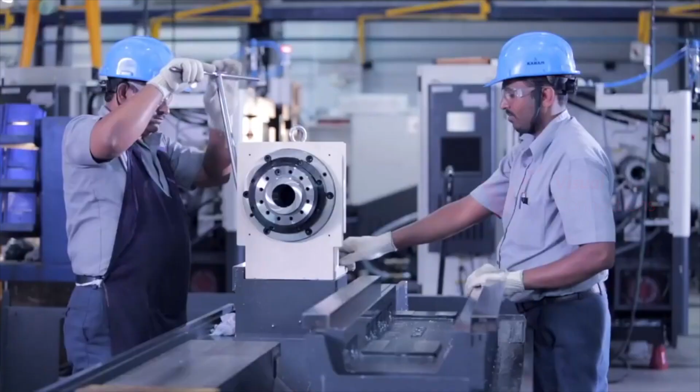With 42 years of machine building excellence and the experience of delivering 60,000 machines, Ace Micromatic Group, AMG, has played a key role in the industrial evolution of India and the world over. With more than 70% repeat customers, AMG is renowned for its technical capabilities in the machine tool realm.

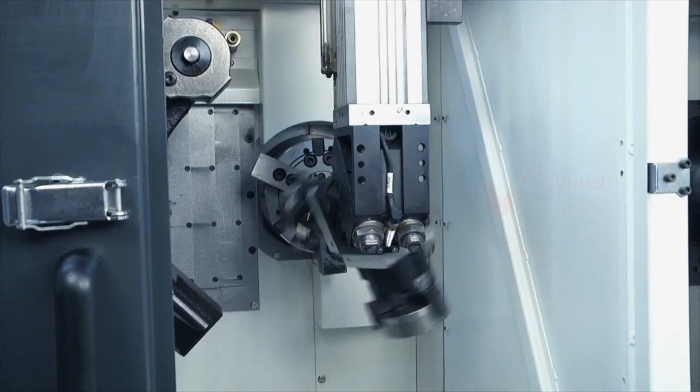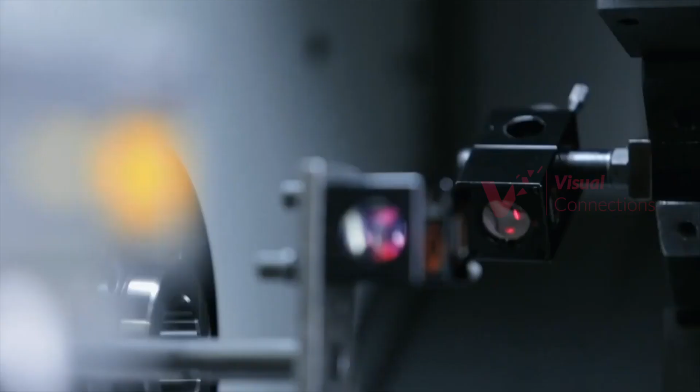Driven by passion for service, cost effectiveness, and a strong value system, AMG is the preferred machine tool partner across market segments. With a global footprint in over 15 countries, AMG machines have been an invaluable resource in producing quality components for a diverse range of applications.

With a vision to be a single window solution provider for all customers' shop floor needs, we offer a wide range of products in the market, ranging from turning, milling, grinding machines, SPMs, to IoT and automation solutions. The group also envisions to diversify into newer technologies and geographies, thereby offering a wide range of solutions to our customers. Ensuring customer success through cost-effective solutions has been the motto of the group.

Today, with the inclusion of AMACE Solutions as our additive manufacturing arm, we are ready to revolutionize the manufacturing industry yet again. The current global metal additive market is valued at $2 billion but growing with a CAGR of 29%. The additive manufacturing technology is rapidly evolving to be a preferred way of manufacturing. It is now seeing widespread adoption in sectors like aerospace, defense, medical, automotive, among others.

AM technology is being explored not only for prototyping but also full-fledged production of parts. With the increasing acceptance of technologies like laser-based powder bed fusion today, we have reached a position where these machines need to be made in numbers viably to cater to the demand that is gaining. We welcome you to the additive manufacturing era.

Additive manufacturing offers unlimited design freedom. Design parts without worrying about process feasibility limitations that come with traditional manufacturing. In addition to this, the technology enables multiple parts with design variations to be printed in one go. AM simplifies part structure by eliminating auxiliary connectors and reducing the assembly time.

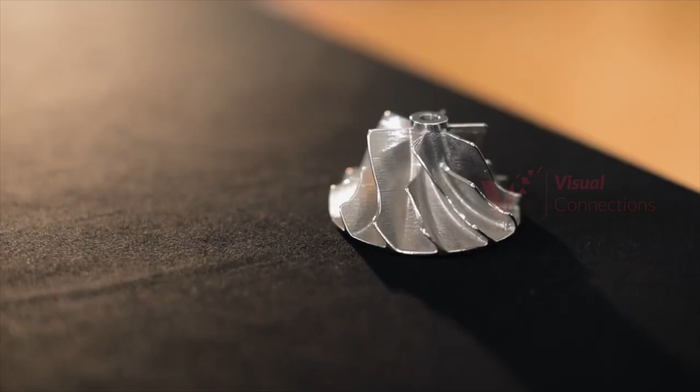Today, with over 10,000 hours of metal printing experience behind us, we have the capability of working with a range of materials like stainless steel, maraging steel, aluminum alloy, Inconel, and titanium. We've reached out to customers from different parts of the world, helping them solve their manufacturing complexities the additive way. Through the years, Team AMACE has worked with customers from automotive, healthcare sector, aviation, space and defense, mold making sector, and other general engineering industries to better understand applications of additive manufacturing.

AM technology is often viewed as process intensive with high machinery cost, low productivity rates, high maintenance cost, and essentially a higher cost per component. The availability of large format machines that follow the powder bed fusion technology is also limited. Most of these challenges have posed entry barriers for wider adoption of this technology. To overcome many of these hurdles, the ALM 400 was created.

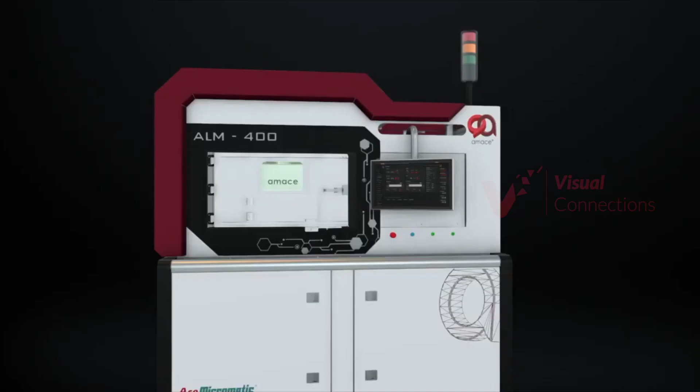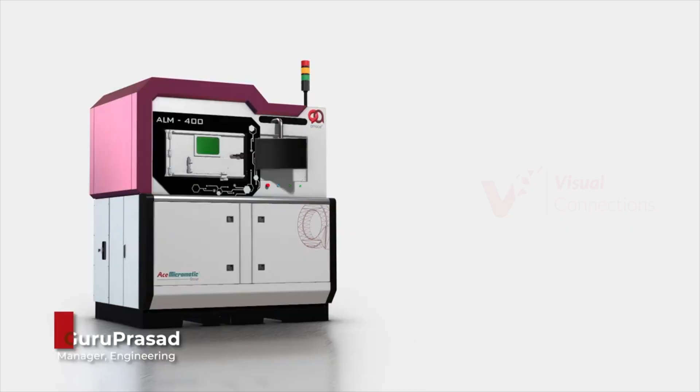For us at AMACE, the focus has always been to develop production-ready machines to suit large volumes of part printing. It provides the flexibility to address the larger sized parts and also higher volumes of printing. The machine is designed keeping in mind the wider variety of materials that would be required for development and experiments by the industry. Versatility of printing has been a key consideration in the engineering process.

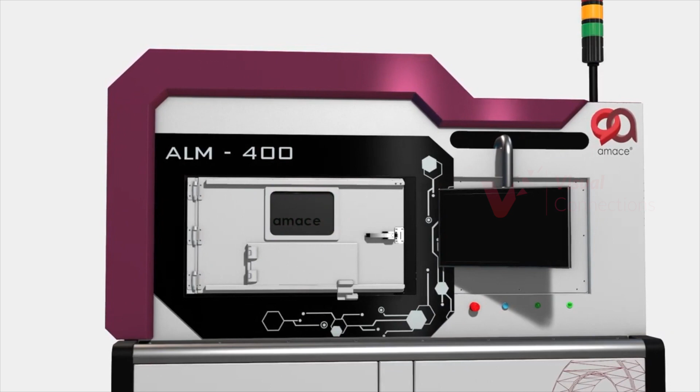The machine is equipped with a high productivity printing process and enhanced build parameters. This allows the printing process to be completed faster. The machine has all the necessary features to minimize the setup time, preparation time, and changeover time. The machine has a build envelope that allows large size parts to be printed on it.

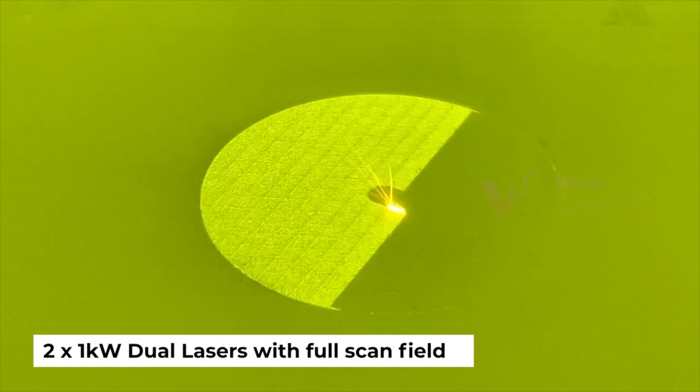A high-powered dual laser system enables faster printing with the ability to print higher layer thicknesses. With two high-powered continuous wave fiber lasers being offered as a standard feature, the machine allows for a wide range of materials and applications to be developed. The machine allows varying layer thicknesses to be printed.

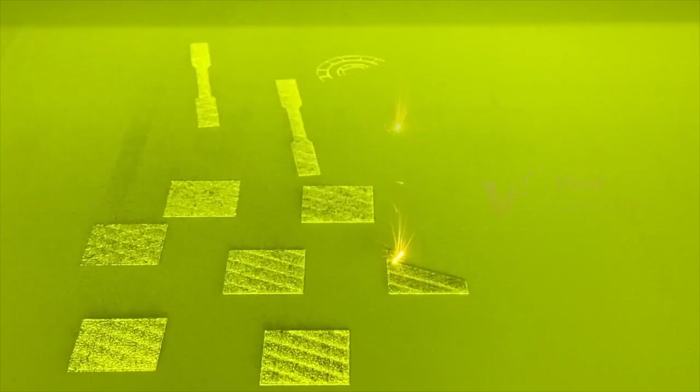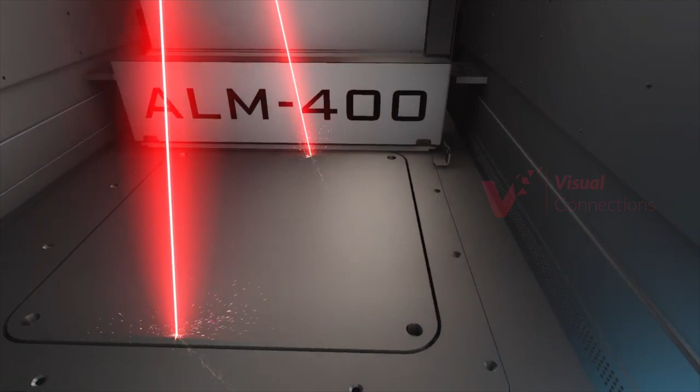The scanning system with digital encoders provides superior positioning accuracies and long-term stability, making it suitable for long periods of printing with minimum drifts. A dynamic focusing system allows exceptionally precise, high-performance positioning of the laser beam along the optical axis. The full scan field scanning system allows both the lasers to reach any corner of the build volume, thus more than doubling the print productivity.

The machine is equipped with an all-servo motor controlled by the most advanced PLC hardware, allowing more precise axis positioning, longer life, and enhanced serviceability. This also ensures a faster recoating, thereby minimizing the overall print time.

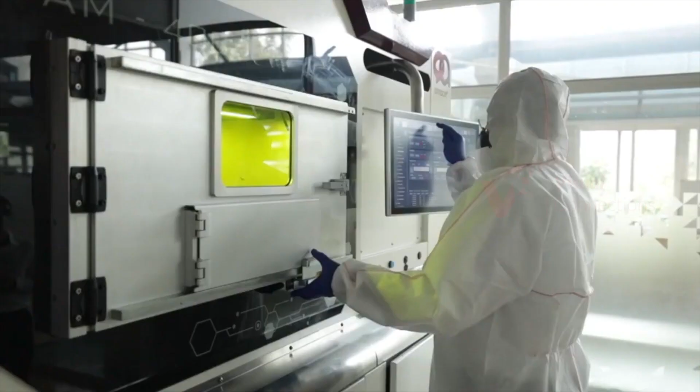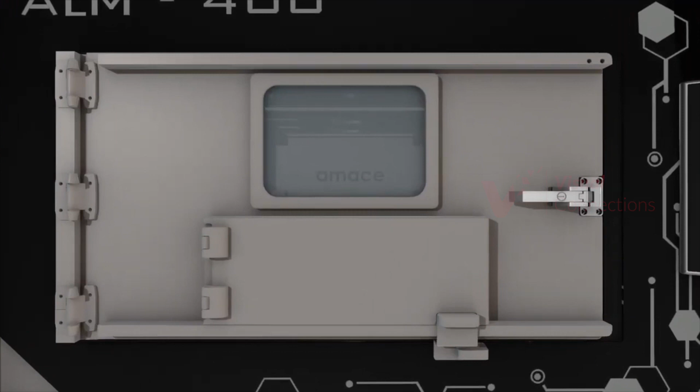An innovative multi-blade recoater system facilitates printing with minimum downtime during a build failure. This technology allows the operator to quickly index the recoater blade in the event of minor damages to it, thereby salvaging the build. A recirculating pump ensures minimum consumption of the inert gas, which is generated from a built-in system. The laminar gas flow on the powder layer maximizes the collection of the burnt powder during the printing process, thereby ensuring superior quality of the printed parts.

The ALM400 comes equipped with a host of features to enable safe and effective powder management. The smart powder management system comes with a real-time powder measurement unit which provides the current volume of powder available in the machine's storage section. A predictive system dynamically estimates the exact amount of powder required to complete the current print job based on the layer volume. This smart system allows the operator to plan for the amount of powder required in advance without having to stall the machine for want of powder.

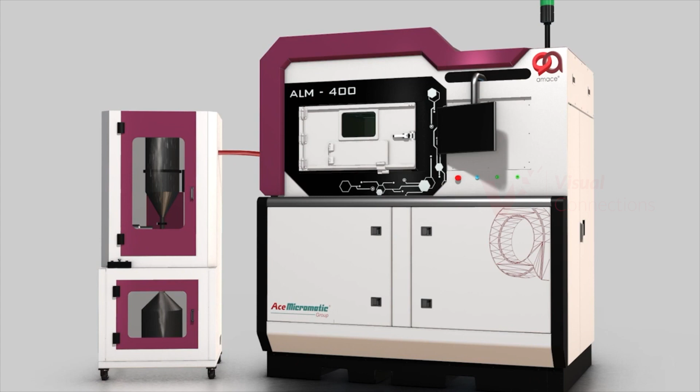A fast powder extraction system from the build chamber post-build ensures the machine is ready for the next print job in short durations. The entire powder collection from the machine's build chamber, sieving and restoring of clean powder is maintained in an inert environment. The machine is offered with fully open, editable parameters for a wide variety of metals such as aluminum alloy, stainless steels, maraging steels, Inconel, titanium, and many more.

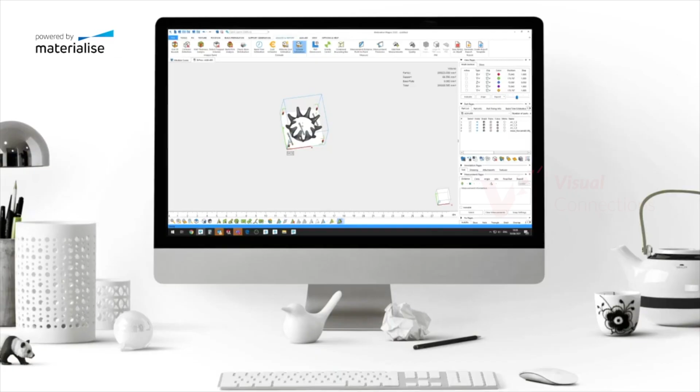The machines are built with best-in-class subsystems providing the highest level of machine reliability and superior quality of printed parts. The laser and scanner control system, which is the heart of the printing process, is controlled by hardware and a custom-developed software from Materialise. The build processor offers a seamless integration with the Magics and support generation software with most optimized data flow for build speed improvements. The machine design is validated by an expert team from Materialise. The ALM400 also complies to some of the most advanced machine building standards in terms of geometric capability assessments.

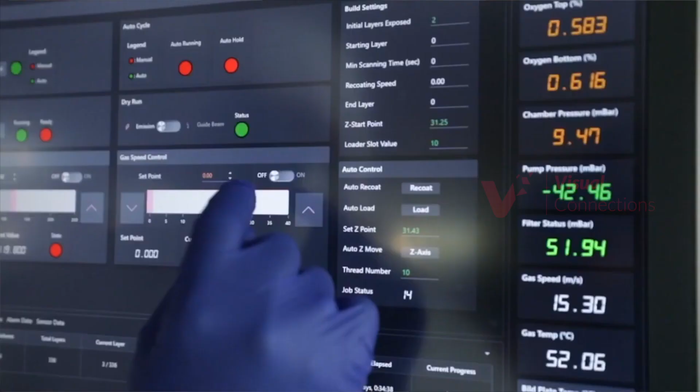The machine is made friendly not only to operate but also for maintenance and servicing. The powder loading is done outside of the build chamber, giving the operator freedom to load powder during the printing process. There are troubleshooting guides that support in faster retrieval of the machine, ensuring minimum breakdown time. Periodic maintenance alerts along with real-time monitoring of the vital statistics of the machine ensures better reliability and higher productivity.

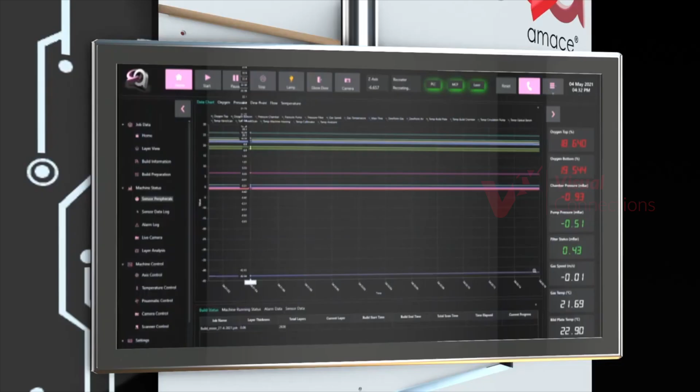The ALM400's control interface comes with inbuilt intuitive features facilitating the user with timely inputs about the machine status and recommends suitable action if required. This also ensures smooth operation with minimal intervention, further enhancing the user experience. Key parameters such as pressures, temperatures, oxygen levels, coolant level, and many other critical parameters are monitored and controlled. A digital cockpit provides the machine's performance parameters with historical data of the build progress.

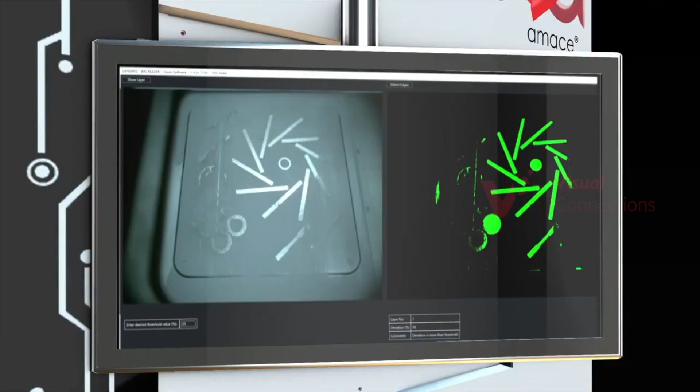A vision-based monitoring and inspection system identifies the deformations or issues in print after every layer. The inspection tool also compares the print area to the layer data and detects any non-conformances in the process, thereby allowing the operator to decide further course of actions.

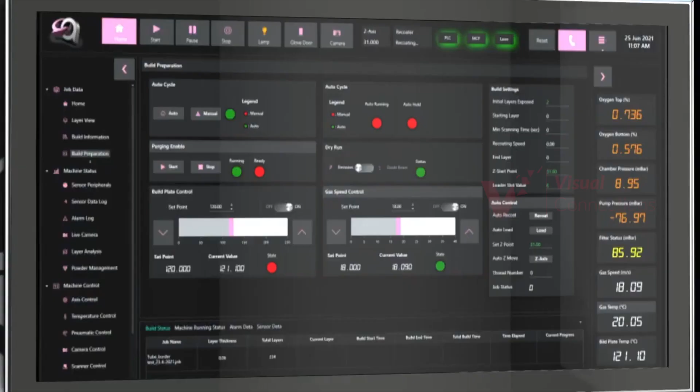A build report generated at the end of the print project provides all the performance-related information for records and quality purpose. The controller also features an auto-purge mechanism for the multi-stage gas filtration system, minimizing the need for manual intervention.

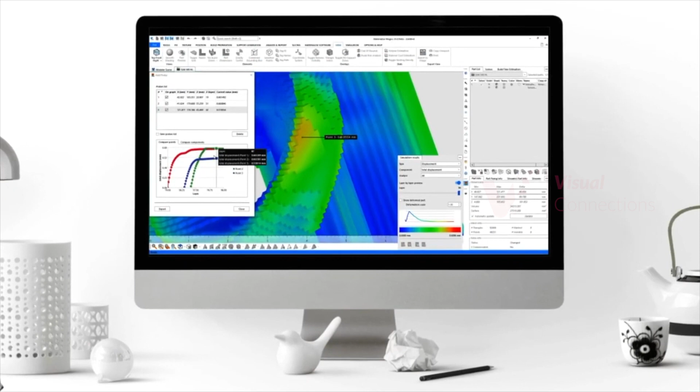The machine is offered with all related pre-processing softwares, starting from optimizing the part design, support optimization, nesting of the parts, and simulation of the parts to make the build more suitable for additive manufacturing. Simulation of build analyzes and predicts the build failure before printing the parts, which ultimately saves the time and cost of the printing.

AMACE offers end-to-end additive manufacturing solution with post-processing equipment, most suitable for finishing the part after the printing to its end-use application. With access of ACE Micromatic Group complete ecosystem of solutions such as machining center, turning center, grinding machine, there is a wide variety of options to choose from. With this, we ensure customers have the competitive edge in the part manufacturing with combination of technologies.

The AMACE ALM 400 machine has been designed to ensure the user gets highest level of productivity at minimum overall cost of ownership. Let's look at some examples here. Up to 600 different designs of aluminum nozzles for a spraying application nested in a single build can be produced in 20 hours. A part like this could typically cost as low as Rs 150 when printed on the machine. In this case of an automotive bracket part, printed in aluminum took as low as 40 hours for a batch of 20 parts nested in a single build.

Another case of printing this aerospace part, the exhaust mixer, which is of a diameter 373 mm when printed in Inconel, took less than 19 hours. A die insert printed in Maraging steel with conformal cooling having a volume of 1600 cc takes about 55 hours to be produced. Not only are these parts faster to produce but also more cost effective. Typically, these parts can be produced 30% faster and would cost 60% lesser when printed on the ALM 400 machine. This makes the machine suitable not just for prototyping but also for serial production applications.

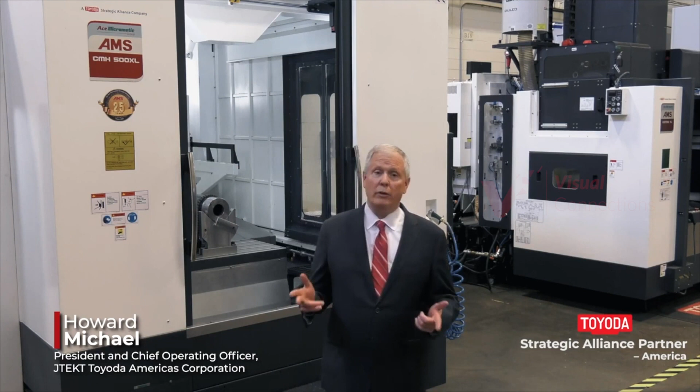Hello, my name is Howard Michael, President and Chief Operating Officer of JTEKT Toyoda Americas. Toyoda Americas is thrilled with our strategic alliance with ACE Micromatic. The addition of ACE products has strengthened our portfolio of high-speed production machining solutions. For several years now, ACE machining centers combined with Toyoda turnkey engineering and robotic solutions have been very successful. The equipment has proven to be robust and reliable in production environments, and as a result, we have steadily increased our inventories to meet the expanding market demand.

We are excited to continue the growth of our partnership supporting ACE Micromatic venture into additive manufacturing with ALM 400 3D metal printing. Many of our customers are already seeing the benefits of 3D metal printing for prototype work. The uniqueness of this new product offering from ACE is the focus on production solutions. We are confident that this machine will be a game changer in the additive manufacturing industry. We are excited to represent this machine and look forward to the value it will provide to the growing additive manufacturing market. Thank you.

With vast network of Micromatic machine tools present in 60 domestic locations and in more than 10 countries worldwide, you will be assured of the best after-sales support. With locally available applications and service engineers and essential spares stocked in every location, we ensure you have maximum uptime.

We are proud to bring to you quality additive manufacturing machines that have been built with years of dedication and hard work, backed by 4 decades of machine building excellence. These series of high productivity machines made to global standards are here to change the perspective of metal printing, facilitating faster adoption. We strongly believe metal printing has come of age and is here to stay.